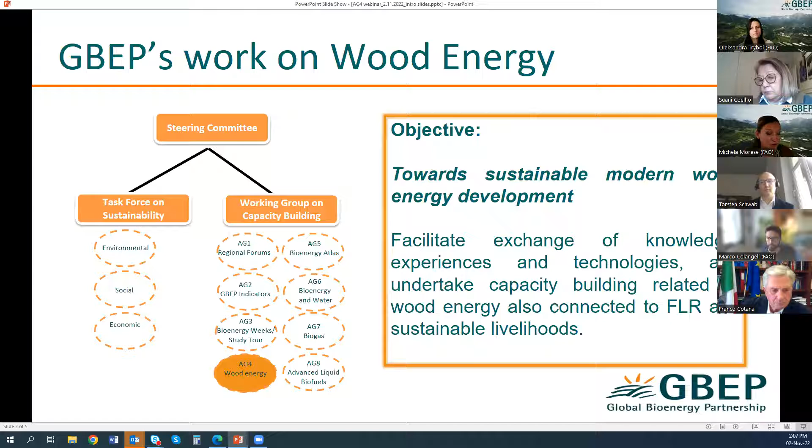Why? Because we like to facilitate the exchange of knowledge, lessons learned, and practices on how to make best use of wood energy in the context of forest landscape restoration, sustainable development, sustainable livelihood, and see how woody biomass can be used also for hydrogen purposes. And this is exactly the case of this webinar today.

We know that hydrogen is seen as an attractive fuel, in particular for transport and electricity generation. And we also know that there are great potentials in terms of sustainable development and sustainable energy transition. So with this webinar, we will have an overview of experiences from Europe, Brazil, and also specific technologies in Europe.

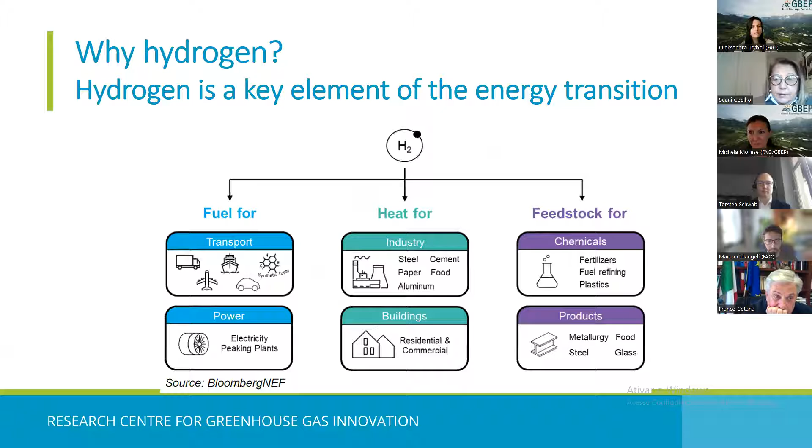It's important to realize that we can have a very flexible hydrogen production. We can produce hydrogen from water electrolysis using, for instance, renewable energy. We can produce hydrogen from fossil fuels, like natural gas or coal. In this case, if we combine it with CCS, we can have a better carbon balance,

using natural gas reforming or coal gasification. And last, but also important, we can have biomass as a source of hydrogen through reforming, gasification, or electrolysis. So with these pathways, we can have a very low carbon hydrogen, which is an important carrier for energy transition.

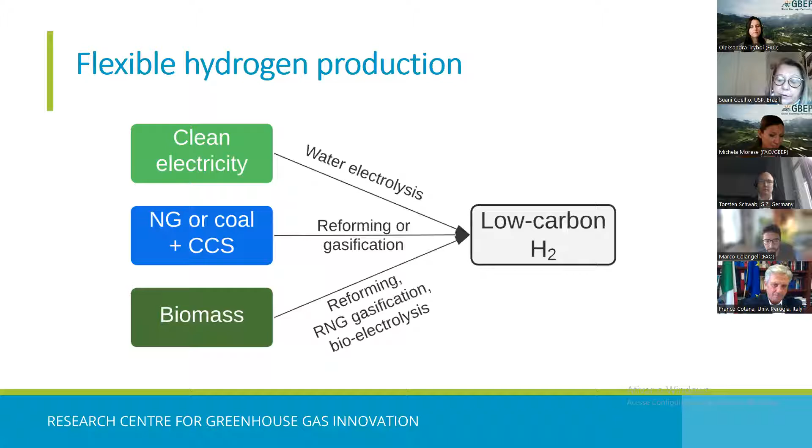Important also that we can put together hydrogen with bioenergy and with carbon capture and storage. As you probably know, when we have bioenergy produced in a sustainable way, we have the absorption of CO2 from the atmosphere in the photosynthesis process. And besides that, we can

absorb the CO2 from the industrial process, like, for instance, sugarcane juice fermentation, and we can take the CO2 to capture and storage, like geological sites, having a much better carbon footprint. And then we can put together the production of hydrogen from biomass with this BECCS process, and it's an interesting option for this sector.

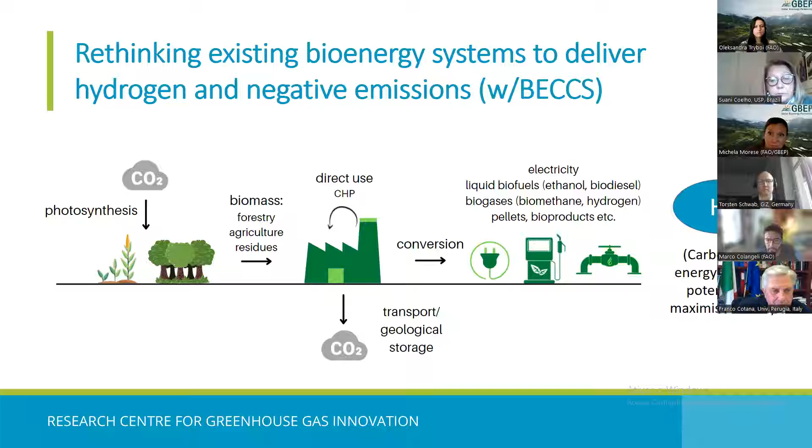So why hydrogen for Brazil? I would raise two main issues. In Brazil, we have a strong need for fertilizers. We can produce fertilizers from hydrogen. As you know, Brazil is a major agricultural producer with soybeans, corn, sugarcane, among others. It accounts for 30% of the cost of major crops, mainly in the state of Mato Grosso, in the Midwest

of Brazil. For instance, in 2018, we imported 2 times the amount we had imported in 2008. And more than 80% of fertilizers used in Brazil are imported. So this issue of fertilizer is a very important issue for us.

Another point to be raised is that hydrogen can be seen as a next step in the energy transition. We have a high potential for biomass and renewable power. And as you probably know, Brazil freight is largely road-based on trucks. We have trucks which are very heavy vehicles running on diesel, which is hard to decarbonize.

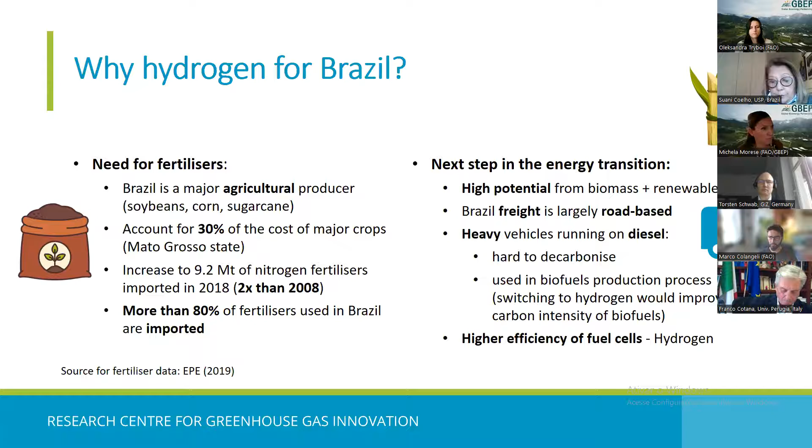Thinking about fertilizer, we have an interesting issue happening today. We have an agreement of Raízen, our biggest ethanol producer in the country. They made an agreement with Yara fertilizer plant to purchase 20,000 cubic meters per day from sugarcane from Raízen. The idea is to replace 3% of the current natural gas use, and they plan to use 100% biomethane by

2030. By the way, this is more or less the consequence of a project that our research group performed for Yara, where we did the assessment of biomethane potential in this region for different productions. The idea is to have the biomethane injected into Comgás utility pipelines and delivered from Raízen mill to Yara. Of course, this is an interesting circular economy concept. And then there are also studies for using biomethane powered trucks to transport the fertilizers.

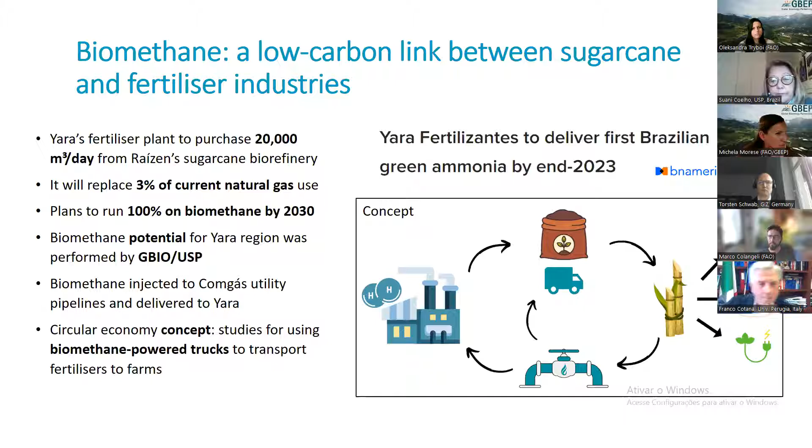As you know, Brazil has a very important sugarcane industry. In the last season, from around 9 million hectares of harvested area of sugarcane, like 1% of the Brazilian territory, we produced almost 27 billion liters of ethanol, responsible for 38% of Brazil's light vehicle energy demand. We also produced 42 million tons of sugar, because Brazil is the largest producer and the first net exporter of sugar.

We also produced electricity from sugarcane bagasse, 39 terawatt hours, which corresponded to more than 6% of the total national supply, besides the amount of electricity for self-consumption, because all mills are self-sufficient in terms of energy.

And recently, we have a new product, biogas and biomethane, produced from sugarcane processing residues. We have 2 commercial scale plants, the one in Bonfim Mill producing 20 megawatts of electricity, the one in Cocal producing biomethane, which is transported in a dedicated pipeline to be used in the transportation sector in the nearby municipality. And we have also other plants announced for biomethane.

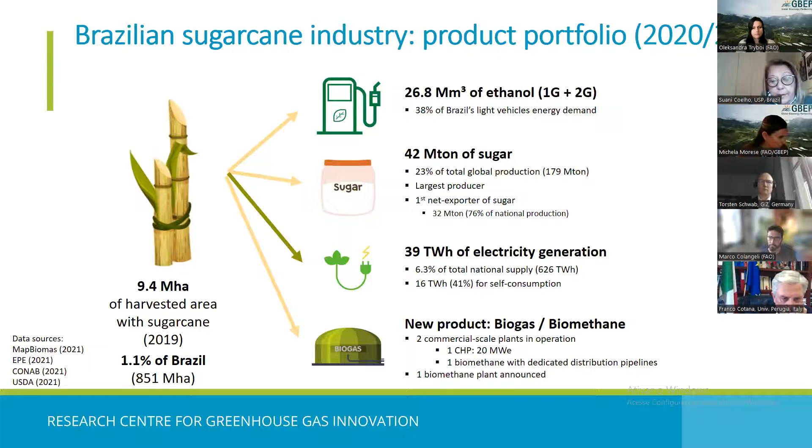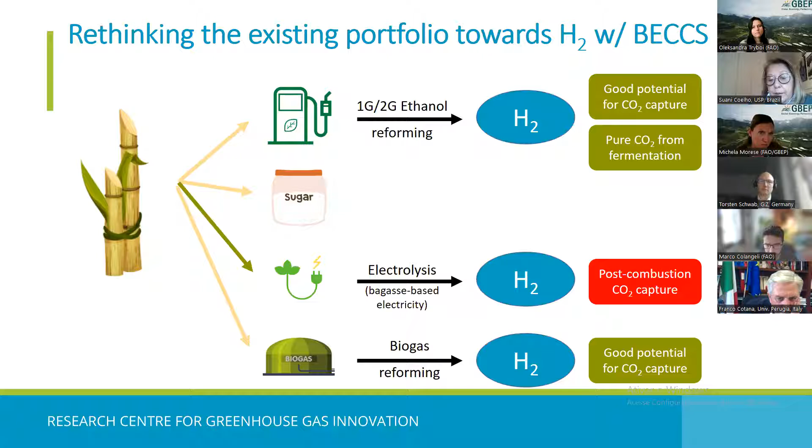So considering these options, we can produce hydrogen from ethanol reforming. We can produce hydrogen using the bagasse-based electricity through water electrolysis. We can produce hydrogen from this biogas with biogas reforming. And we can also put together this hydrogen with the CO2 captured, as I mentioned before, CO2 from fermentation, CO2 from bagasse combustion, CO2 from biogas upgrading. So we have interesting options, not only for hydrogen, but also to capture CO2 and to do several processes based on this.

We have developed some preliminary studies paying attention to the hydrogen potential in Brazil from the sugarcane sector. We consider basically ethanol reforming, from ethanol produced in both first generation and second generation processes, considering 40 liters per ton of cane in the distillery coupled with sugar production, with 23 liters per ton of cane produced from second generation ethanol.

The second process, electrolysis from surplus electricity generation from bagasse, we consider 49, around 50 kilowatt hours per ton of cane, and biogas reforming, where we consider around 9 cubic meters of methane per ton of cane. So based on this feedstock potential, we evaluated the hydrogen potential, and we got around 10 kilos of hydrogen per ton of cane.

Well, it's important to remember that we have a huge sugarcane production. Last season, we produced more than 654 million tons of cane. So we could have more than 6.5 million tons of hydrogen produced in the country. But of course, for that, we need several policies to incentivize it.

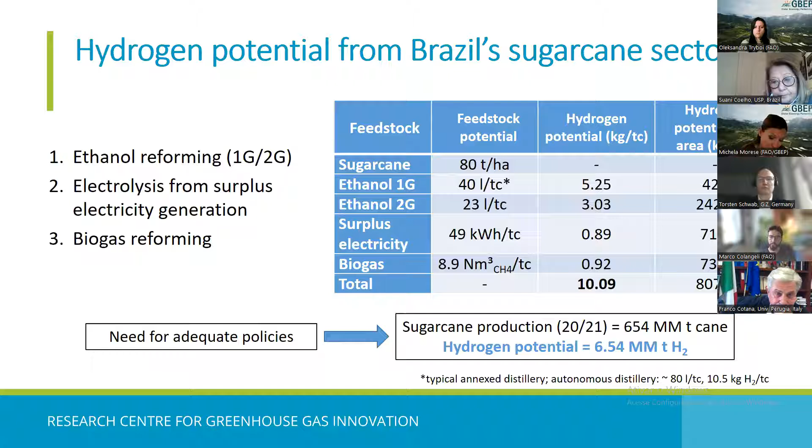Some latest news: we now have a new project at the University of São Paulo, funded by Shell, putting together Raízen, the sugarcane producer, Hytron, producing the ethanol reformer, and the research group of USP. So we will receive the ethanol from Raízen. We will have this ethanol transported to a fuel station at the University of São Paulo campus and stored.

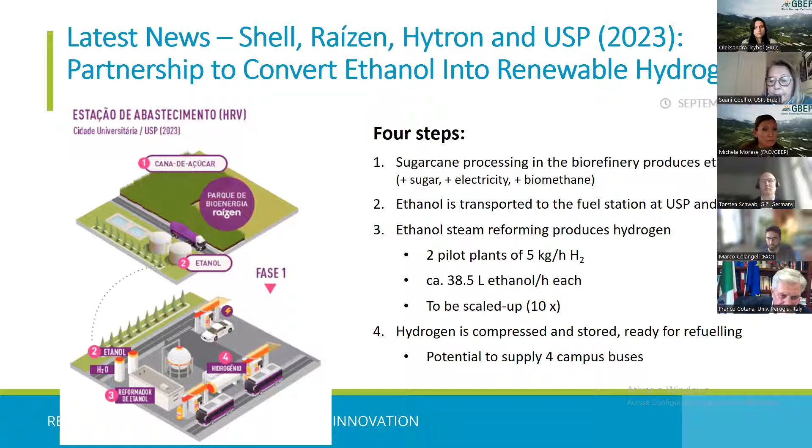We will have the ethanol steam reforming process with 2 pilot plants of 5 kilos per hour of hydrogen, more or less 38.5 liters of ethanol per hour each plant. There are perspectives to be scaled up, but by now, these 2 pilot plants are going to be in operation. The idea is to have the hydrogen compressed and stored and to supply buses running on the University of São Paulo campus.

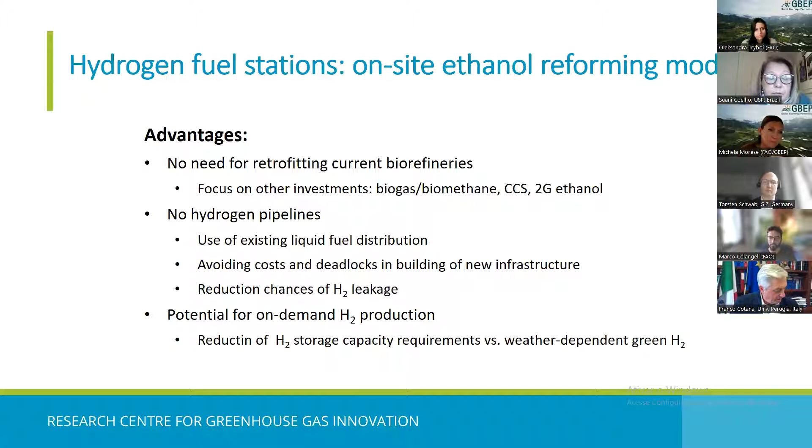Why is this important? We do not need to retrofit current biorefineries, and then biorefineries can focus on other investments: biogas, biomethane, CCS, second generation ethanol. We don't need hydrogen pipelines. We can use existing liquid fuel distribution, avoiding costs and deadlocks of new infrastructures. We have an important reduction in the chance of hydrogen leakage, and we have interesting potential for on-demand hydrogen production.

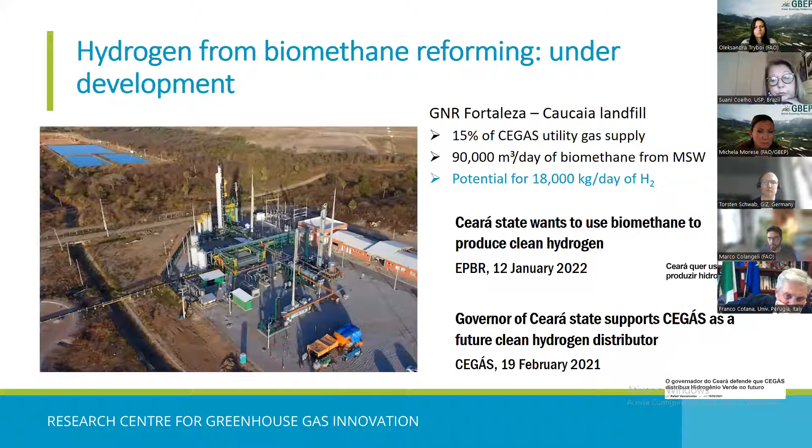Still talking about latest news, we have the largest biomethane plant in Ceará, northeast of Brazil, already producing biomethane, like 90,000 cubic meters per day from a landfill. And now they just announced that they are going to use this biomethane to produce clean hydrogen through biomethane reforming.

Considering this idea, we did some recent evaluations of the potential for hydrogen production from biogas in the sanitation sector. Considering that we have a biogas potential in Brazil of 2.2 billion cubic meters per year, or, related to biomethane, 1.13 billion cubic meters per year, we can have a hydrogen potential only in the sanitation sector of about 2.34 million tons per year, distributed in the country, mainly focused in the state of São Paulo.

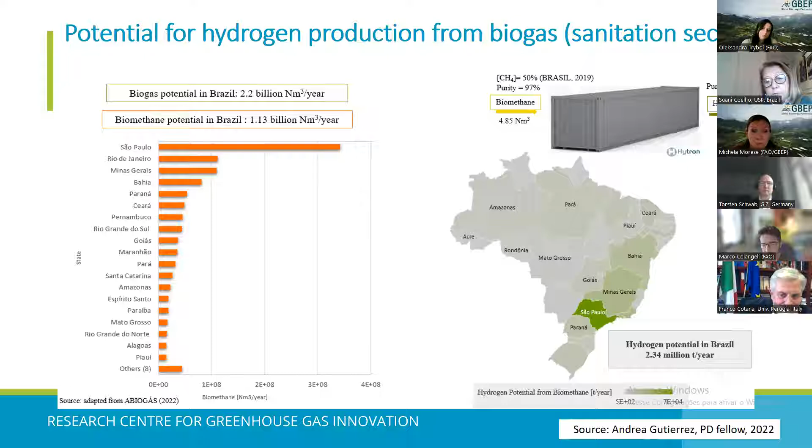One of my last slides: we can also think of producing hydrogen from gasification, from refuse-derived fuel gasification, from municipal solid waste. We have got interesting potentials for this advanced technology. And the main important issue to be remembered is that when we are having new and high added value for residues, mainly municipal solid waste, we are contributing to sanitation in the country.

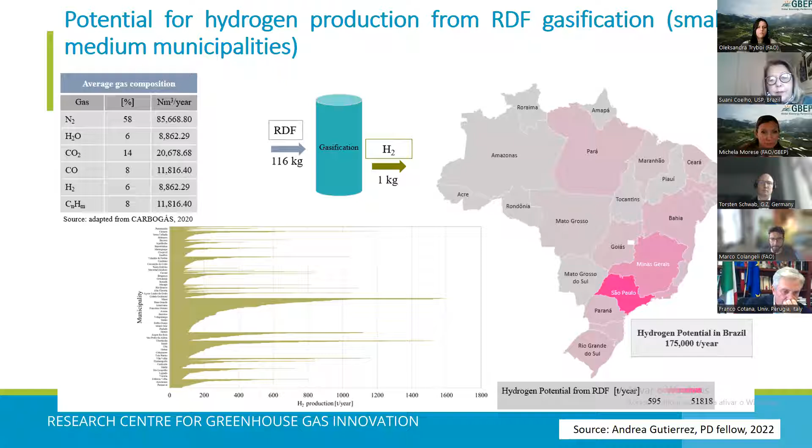As you know, in Brazil, as in other developing countries, we still have lots of problems with adequate municipal solid waste disposal. So we have to look for solutions for the collection and disposal of municipal solid waste. So the production of hydrogen is an additional product that can contribute to the feasibility of the adequate disposal of municipal solid waste. My final slide, some final remarks.

So why hydrogen from biomass? You can have the decarbonization of heavy vehicles. We have an important potential use for fertilizer production, closing the loop. As I said, we are highly dependent on fertilizer imports. We can have the possibility of a negative carbon footprint, putting it together with BECCS. As we saw, we have a very important sugarcane potential. The first project of ethanol reforming is now on the way at the University of São Paulo.

We can also have corn ethanol, which is now leading biofuel expansion in agricultural states like Mato Grosso, with an important potential for hydrogen in trucks. We can also produce methanol from hydrogen combined with CO2, since methanol is an important liquid biofuel with several different uses, and even to export. As we saw, we have significant potential in other sectors, not only sugarcane, for instance, the sanitation sector.

But what are the challenges? Brazilian civil society must understand the need for change, for hydrogen, for energy transition. We have to disseminate this idea so Brazilian civil society can be aware of it. And of course, we still have a lot to work on for adequate policies, which are not fully in place yet. So I think this is it.

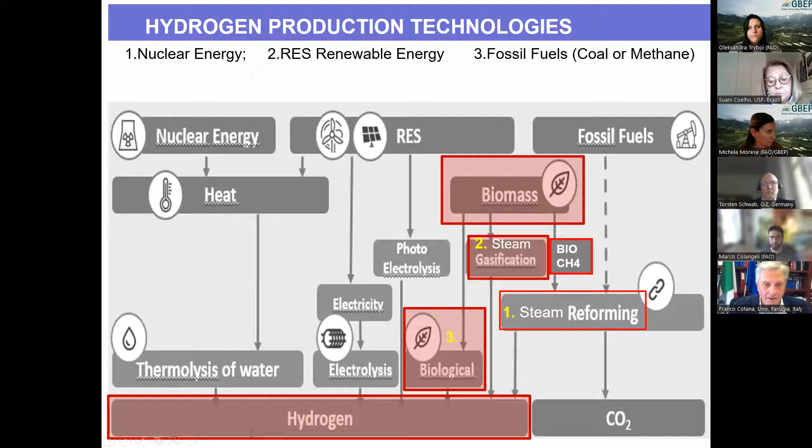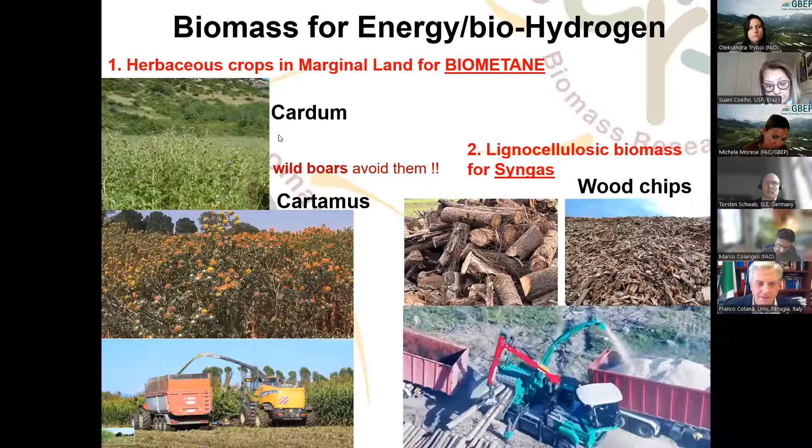In this slide, you can see some examples of herbaceous crops in marginal land used in Europe, also in Italy, to produce biomass for biomethane, or biogas. Some examples like cardoon or cartamus—wild boars avoid them, which is not a secondary problem in our country—are suitable for transforming biomass into biomethane. But a large quantity of lignocellulosic biomass is also available to transform, part of it, into wood chips and by gasification into syngas in order to obtain hydrogen.

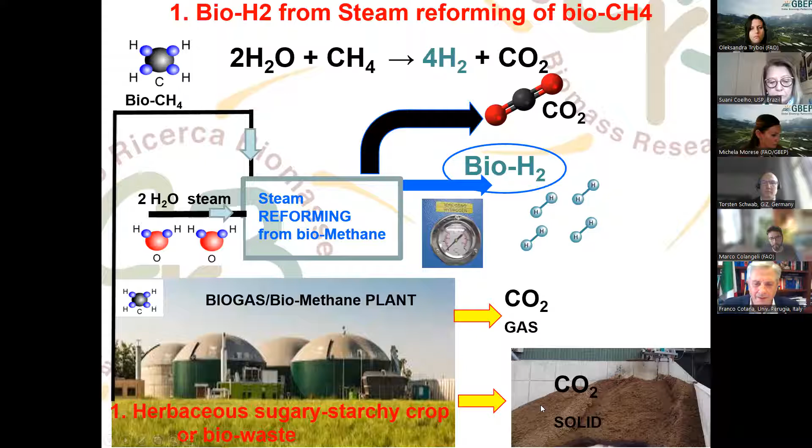The first technology, starting from biogas, biohydrogen is now being produced in some applications, but a large program in Italy and Europe is still financing the production of some billion cubic meters a year of biomethane to put in the grid. The very interesting thing is that in this case, some CO2 is not re-emitted into the atmosphere but is stored in solid fertilizer. So there is not only the possibility to capture and store the CO2, but also the possibility to store the CO2 in the land as fertilizer.

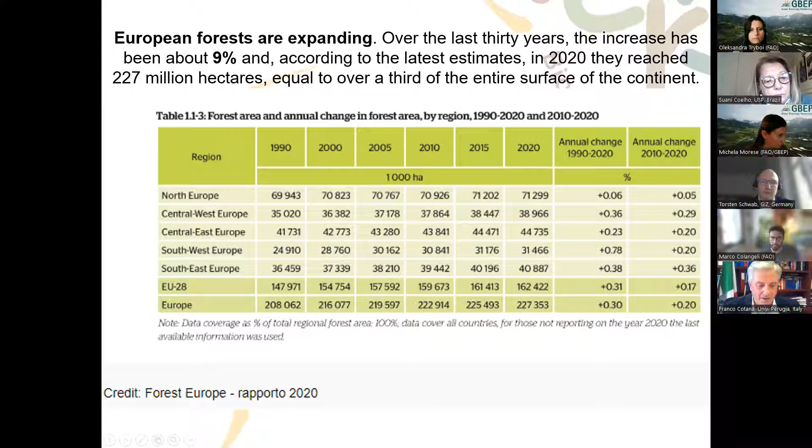Forests are a great source for the environment and offer multifunctional services. In addition to absorbing CO2, they maintain biodiversity, are used for tourism, for food products such as asparagus, truffle, mushroom, game, and so on. Finally, every 30 years they allow sustainable harvesting of wood for various uses—furniture, packaging, energy. A part of this energy, for example 20%, could be transformed into biohydrogen or renewable hydrogen.

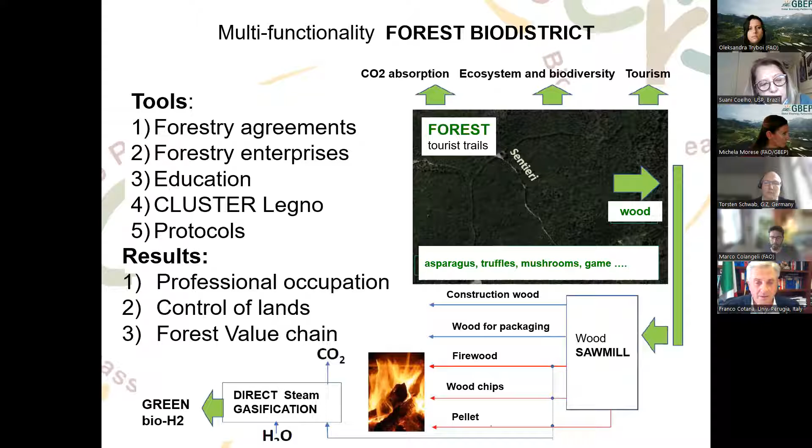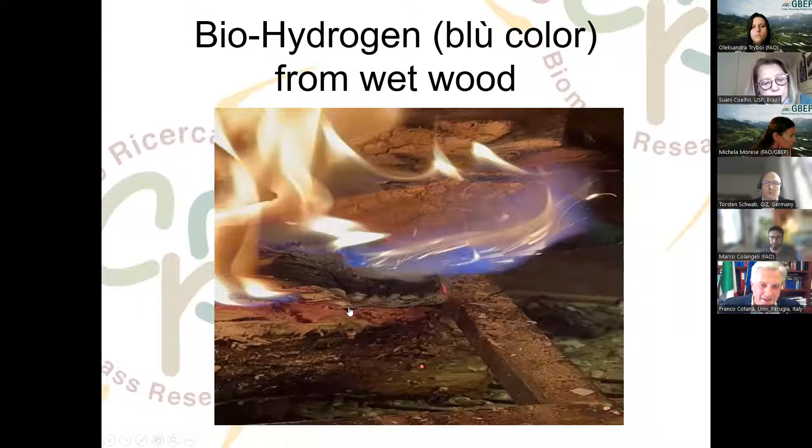Just see what happened in the house when the fire transforms some wet wood into a flame. You can see the characteristic hydrogen produced by wet wood.

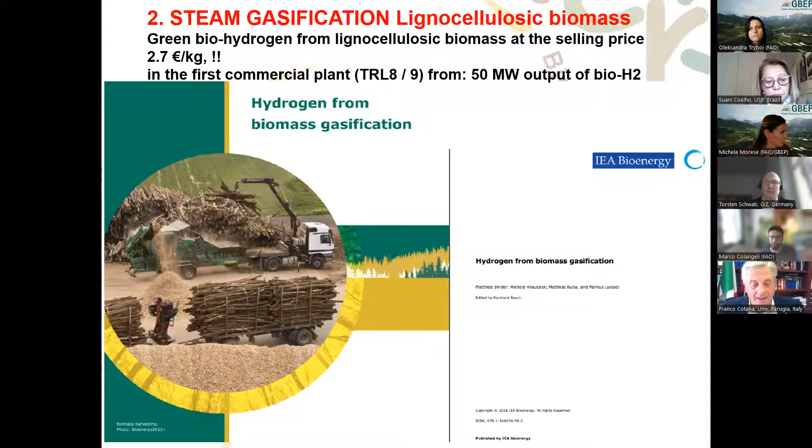The technology for converting wood into biohydrogen or renewable hydrogen is described in detail in a report published in 2018 by the International Energy Agency Bioenergy. This technology is based on direct conversion by gasification of wood chips to obtain syngas, to which high temperature steam is added to increase the hydrogen content. This process is called steam gasification, as you well know.

In the wood steam gasification process, the hydrogen content can reach up to 70%. Also in the same report, the selling price of biohydrogen obviously depends on which power plant scale we consider, but the selling price could be less than 3 euros per kilo in the largest power plants.

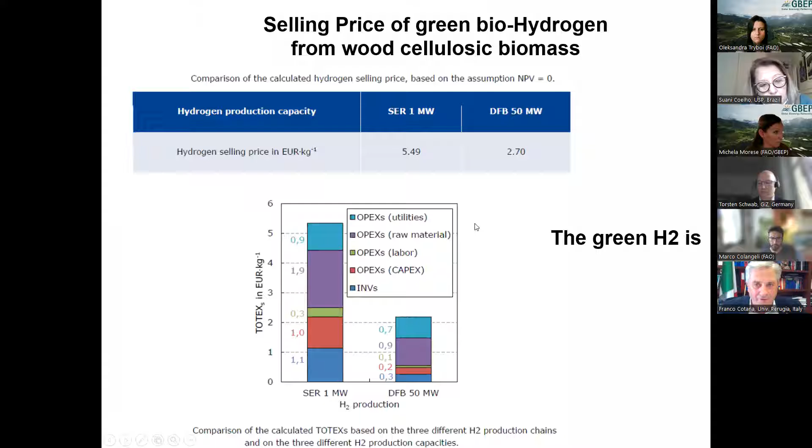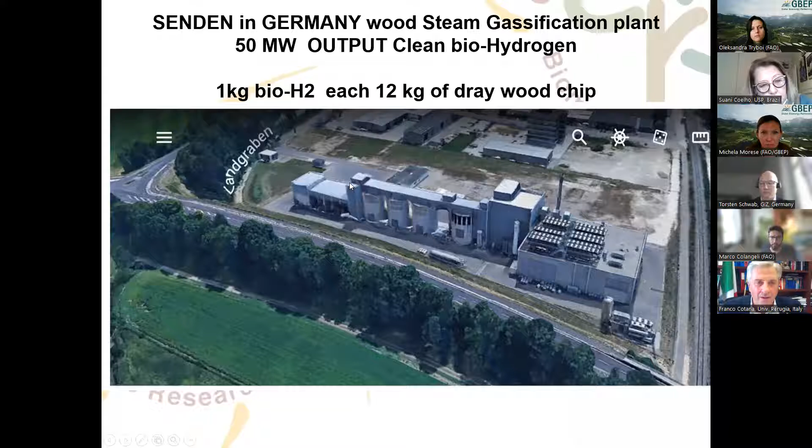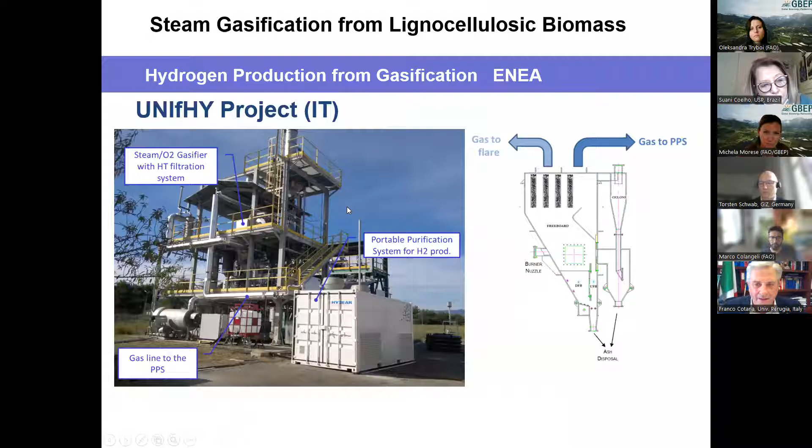This is a 50 megawatt plant in Senden, Germany, where 1 kilo of biohydrogen is obtained from each 12 kilos of dry wood chip. And this is another plant in Italy, from ENEA, which reproduces the same process at a smaller scale.

You have to consider this energy balance: about 12 kilos of dry wood chip is enough to produce 1 kilo of hydrogen with high efficiency.

Instead, consider the second path: converting biomass to power, and then using that power through electrolysis to produce green hydrogen. In this case you lose more than 80% of the energy. So it's more convenient to convert the wood chip directly into green hydrogen.

Also here, you get biochar as a result of this process, in order to store part of the CO2 that is not re-emitted into the atmosphere.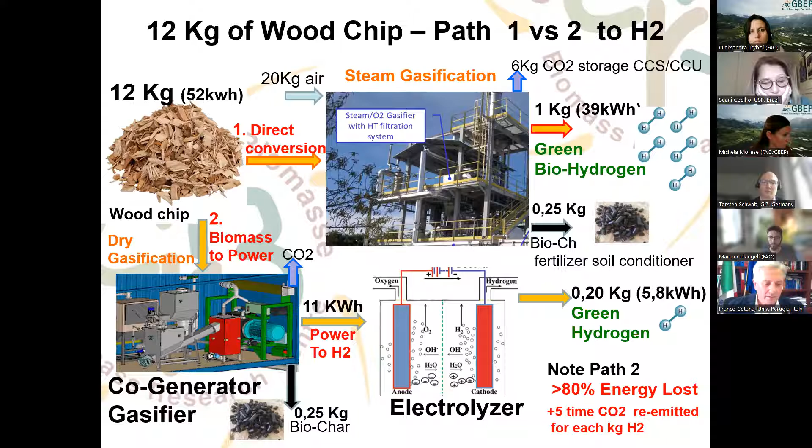Moreover, in Europe, the path towards European hydrogen is represented in these slides. In the next 10 years, very significant financing is devoted to funding hydrogen production.

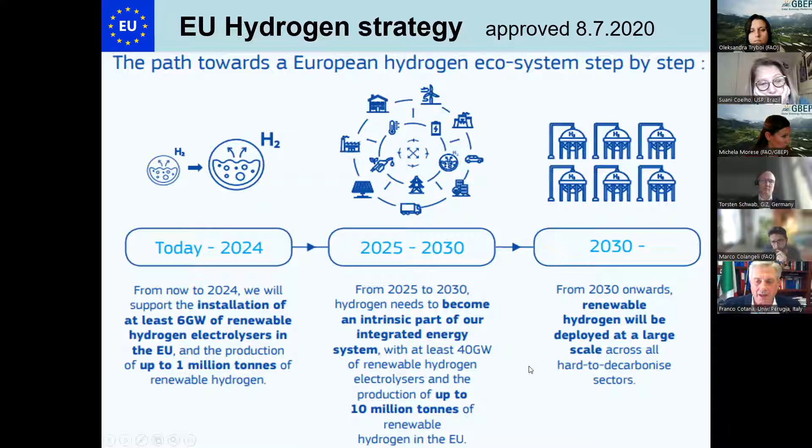Further, the development of electrolyzers is expected to reach several gigawatts of renewable hydrogen electrolyzer capacity in Europe by 2024. But by 2030, we expect at least 40 gigawatts of renewable hydrogen electrolyzer capacity, producing up to 10 million tons of green hydrogen. After 2030, we will start decarbonizing the large, hard-to-abate sectors.

Moreover, this year, two or three hydrogen wave IPCEI projects were approved — IPCEI being the Important Projects of Common European Interest.

The first one was approved in July of this year, involving 15 European member states, and provides up to 5.4 billion euros in public funds, which is expected to unlock an additional 8.8 billion euros in private investment.

Again, on September 21 of this year, the EU Commission approved up to 5.2 billion euros in public support, involving 13 member states, for a second important project of common European interest. We expect this financing to unlock an additional 7 billion euros in private investment.

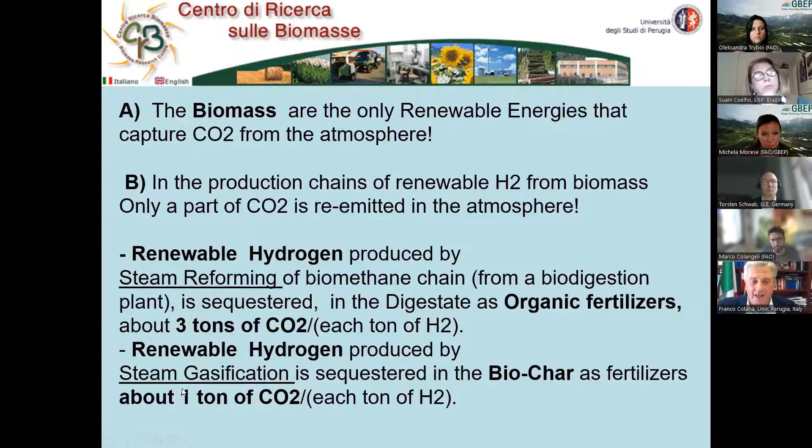Second, in the production chain of renewable hydrogen from biomass, only part of the CO2 is re-emitted into the atmosphere. In fact, in the two main processes: renewable hydrogen produced by steam reforming from the biomethane chain sequesters about 3 tons of CO2 per ton of hydrogen in digestate used as organic fertilizer. And renewable hydrogen produced by steam gasification sequesters about 1 ton of CO2 per ton of renewable hydrogen in biochar used as fertilizer.

Okay, this is the figure that I wanted to show. Thank you, thank you all.

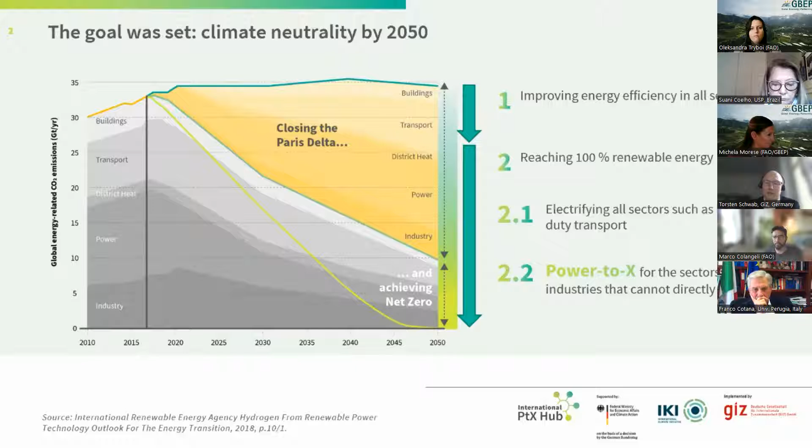But let's have a look at the whole picture. And I brought this slide here to explain a little bit our approach, our vision, our perspective on green hydrogen. Take a minute, have a look. So if you look at this, we divide it into the decarbonization and the defossilization.

So the decarbonization is the lighter background part there. And it actually means everything where we take the carbon atom completely out of the picture. So if we do electrify something completely, like heating a house without burning gas or burning any carbon-based fuel, do it with electricity, do it with a heat pump. The same goes for mobility. Then we're actually decarbonizing something.

Then if we still need a molecule which contains carbon, it would be a defossilization. That's the rest of the picture. But in the end, we want to provide everything that mankind needs today. So that's all the sectors you can see here: chemicals, cosmetics, pharma, aviation and shipping fuels, industry, steel, chemical, others. And we need to still provide these in the future.

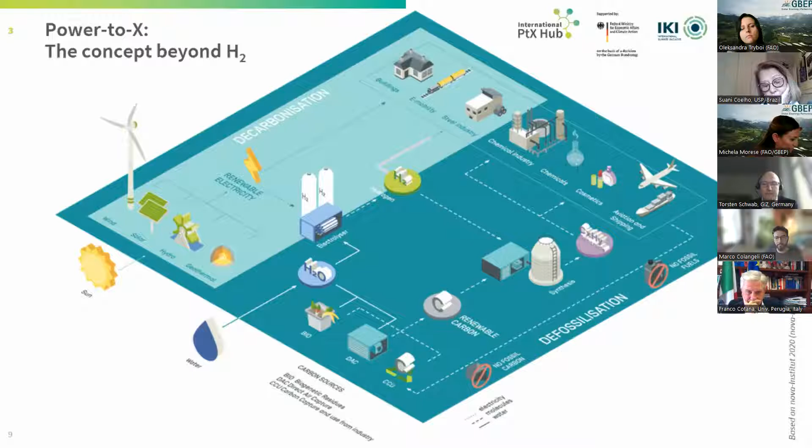Now, moving on to have a closer look at the carbon source, we can see most of the carbon used today is used for energy and fuels and stems from oil, gas, and coal. If we take away oil, gas, and coal, carbon becomes a very rare product, a very rare input. It's so valuable to the whole PTX setup and a completely defossilized economy that we shouldn't forget about it. It's more valuable, I would say, than hydrogen, because hydrogen is relatively versatile in its production.

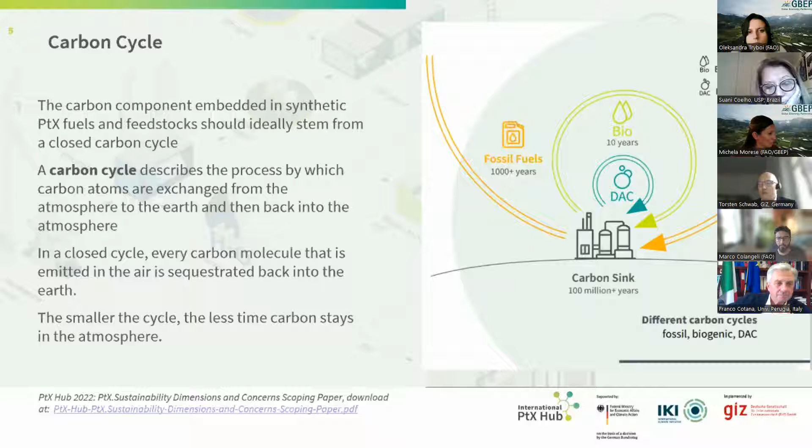The biogenic sources are very interesting today, because where they are available—that's the restriction—the technology maturity is there, it's very high maturity, we can use it, it's relatively low cost, and it can be scaled where there are actually installations.

And the interesting thing about this scalability is that the size these biorefineries come in, as we can see all over Brazil, is more or less the size that would fit the new generations of PTX machines. Usually we say the bigger the better, but with carbon being the restraint, we have to scale to a size where we can actually provide hydrogen, carbon, and then the follow-up process together. So here we can say that we're in the right range of size.

The last option would be CCU, industrial point sources. They don't have a closed carbon cycle if the material that goes into the industrial process is from fossil sources. So we shouldn't use them forever, but as a transition technology, they serve, and the costs are quite low to provide the carbon, usually as CO2 in the exhaust gas, and the technology maturity is also at a good level.

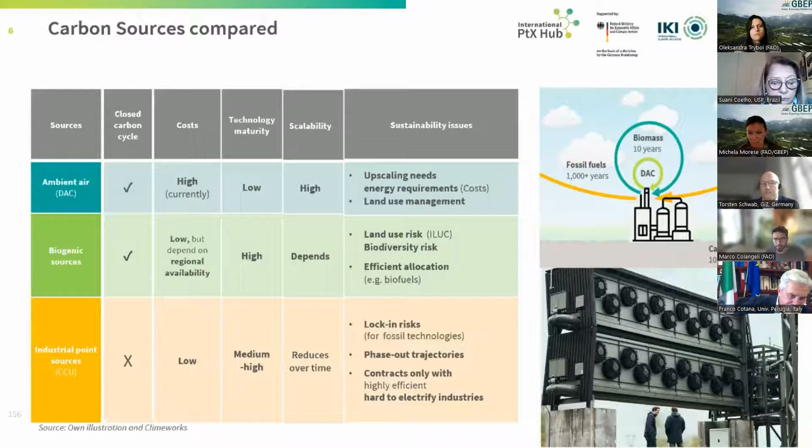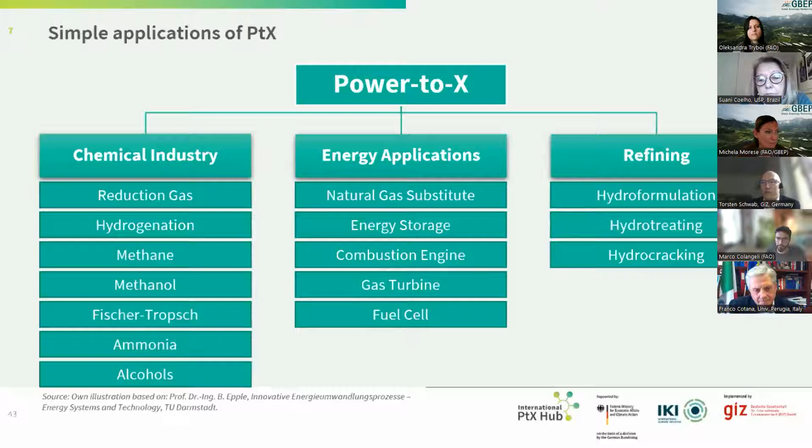The refining side is quite interesting. As long as we refine longer hydrocarbons from crude oil, hydrogen comes in as a very important product. But as we phase out coal, oil, and gas, it becomes less important. So the chemical industry is the one that will prevail, and we will need to provide materials for that. The numbers are really high. It's nice to see the numbers Suani presented - they are big, as we're used to from Brazil, but they're promising. We can actually provide many of these products the chemical industry around the world needs.

The sectors that most need our attention are shipping and aviation for fuels, and steel, chemical, pharmaceutical and cosmetic industries for the industry sectors. So there is so much to do and so much to provide that all other sectors are possible offtake sectors. But if we really want to bring about a defossilized future for the whole globe, there are sectors where it's a no-regret option to invest.

Now, 2-3 last slides with some words on sustainability. When we look at the topics we look at, we usually look at carbon emissions. We see the emissions and say we have to be climate neutral, but there are so many other things we should not forget. We should avoid tunnel vision, and think of setups where we can actually provide a solution for the sustainable development goals as a whole.

The cool thing about combining green hydrogen from renewable electricity with any biotechnology - combining the energy content from electricity harvested by wind and sun together with a carbon source, be it solid, liquid, or gaseous - is that it's usually in distributed setups, in a size that would benefit the whole society, with a lot of effects in situ. So we can do closed carbon cycles, even closed circular economies in municipalities, federal states, countries, regions, and of course the globe also. The chances are that we can socialize what is today the fossil world, and that's a chance we should try to make the most of.